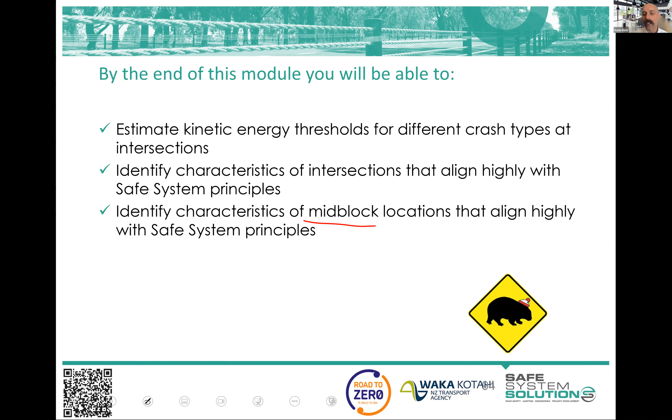Safe system assessment is sort of this entity that does a lot of what road safety audits do and a bit of what design reviews do, and a bit of stuff on their own there. Then there's a thing, safety in design - can it be built safely, can it be maintained safely, can it be decommissioned safely, and all of that. There's a lot of workplace health and safety focus to it, but there's wider stuff to it as well.

And then there's some sort of, I don't know, put DDA audit - Disability Discrimination Act. It's not called that in New Zealand, but it's: can everybody with all abilities use the facility that is going to be constructed? So that's another independent check.

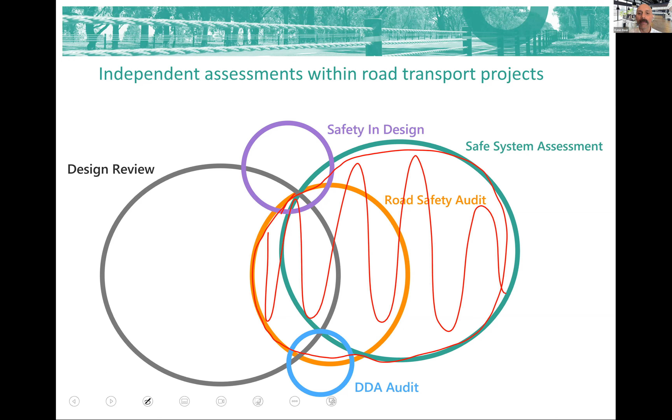So you see there's quite a few of these checks, but what New Zealand is going to be moving towards, as I mentioned last time, is really to say, well, those two have some overlap, so can we combine all of that into one there, and calling that a safe system audit - sort of combining that road safety audit, safe system assessment terminology.

Okay, let's jump straight into intersections. I have a little task for you to do shortly, where you'll have to do some thinking about an intersection I show you.

Intersections are a really fascinating part of a network, and they certainly have conflict points. We think about vehicles colliding at intersections, but there's a lot more risk at and around an intersection than simply vehicle-to-vehicle collision.

There's the spot where pedestrians have to cross to get through the intersection. We also have a whole lot of fixed hazards, like signal pedestals, power poles—which often end up close to intersections because they jump over the intersection or turn a corner—and lighting columns.

At these intersections there's quite a lot of turbulence. If it's signalized, sometimes people overshoot or miss the signals. If it's passively controlled with give way or stop signs, somebody might miss that, make a bad judgment, and vehicles then avoid, leaving the road trying to avoid the crash, or they clip the vehicle.

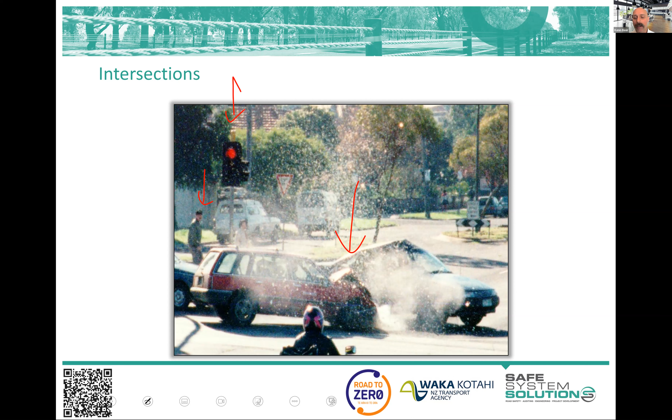So we have not just an increased risk of vehicle-to-vehicle crashes, but an increased risk of run-off-road crashes, pedestrian crashes, bicycle crashes, and motorcycle crashes. Pretty much everybody's at higher risk here, with multiple crash types created just from all of this happening. So it's a really important part of our network to analyse what we can do about it.

Monash University Accident Research Centre a while back came up with some high-level principles. Interestingly, they started with fewer vehicles and fewer intersections—isn't that interesting? In terms of our exposure times likelihood times severity equation we started with last time, that's really all about the exposure, so less exposure to crashes.

Then we get into fewer conflict points per intersection—like making it left in, left out, or trying to reduce some of the turn movements, or controlling it in different ways. That impacts the likelihood of crashes.

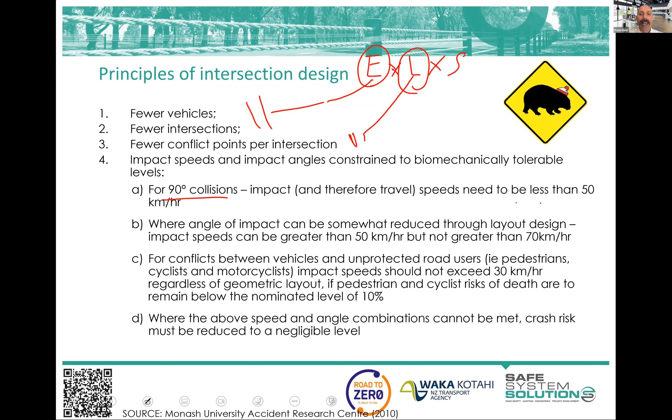Then we get into the severity of crashes, talking about trying to manage speeds and angles to biomechanically tolerable levels. They've popped some examples in here—90-degree angle crashes between passenger vehicles to be less than 50 kilometers per hour. This is all about the severity of crashes.

If the angle is somewhat reduced, we can go a little higher in speed. This goes back to your year 11 vectors—at an angle like that, you're pushing some of the energy out into the environment, compared to an angle where less of the energy is pushed out into the environment.

Head-on crashes are an interesting one—there's not much at all pushed out to the environment. However, vehicles are engineered in a very good way for frontal impact: crumple zones, airbags, seatbelts, everything operating for that frontal impact. So we're actually able to withstand higher forces.

So if you can get more angle, you're probably talking about somewhere in the 60 km/h range that's generally considered within tolerable limits. This is just for passenger vehicles.

When we start including vulnerable road users—pedestrians, cyclists, and motorcyclists—there's some more recent research showing motorcyclists are a little higher than pedestrians and cyclists in ability to withstand force, but not a huge amount more. We're talking about trying not to exceed 30 km/h. Kathy, in her warm-up quiz question, was pointing out the World Health Organization talks about 30 km/h for the possibility of death or serious injury significantly increasing above that speed for pedestrians and cyclists, and there are other non-specific road safety benefits associated with these lower speeds—it's a really good starting point.

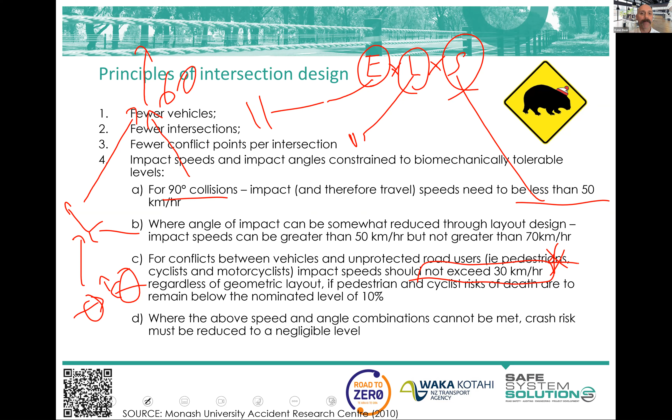Now, I've popped lots of these tables and things, but the colorful spectrum chart that I showed last module, I think, is the important one you use in safe system assessment as a starting point, somewhere you can look to gauge what sort of score should we be giving to this. You can see there, 40, 50, generally okay, 60 - this is for passenger vehicles, 60 km/h - somewhere in those angles between that. And that's from KEMM-X, which is a thing called the kinetic energy management model, which as a safe system assessor you would never need to go into that detail of using.

Well, I shouldn't say never - somebody might request a very, very in-depth safe system assessment. But as a safe system assessor, and I've done hundreds and hundreds of them, I've never had to use KEMM-X in order to determine what sort of score I'm putting on intersection crash forces. The sort of general broad brush nature of that chart and some knowledge around these figures is plenty to get you to that point.

Ken, just a quick question - does some of these figures still allow probability of serious injury, and how does that make it consistent with Road to Zero? Yeah, it's a really good question.

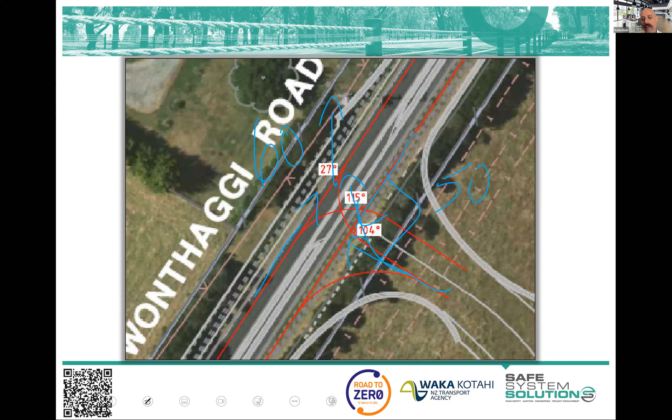So I'm saying that probably around the 60 km/h mark is what we would think of as a threshold speed, and this one around 50 as a threshold speed for passenger vehicles. So it's as simple as that - thinking angles, thinking speeds - and that helps you determine what's appropriate and how you might score it within a safe system assessment. But I do want you to think about that secondary impact I alluded to.

It's kind of rare—I mean, this does happen—it's pretty much a direct straight hit like that.

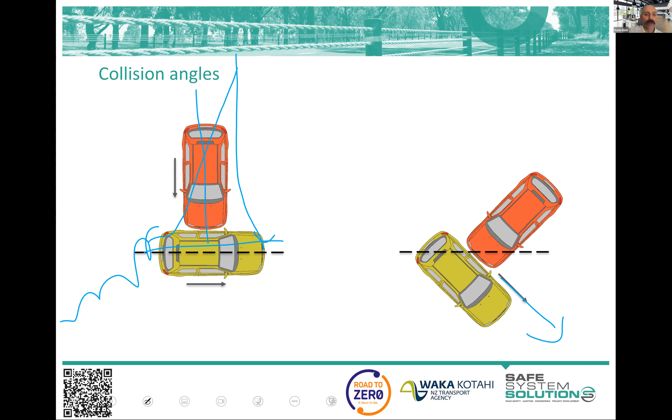But even with those, you have the entity of vehicles careering out that way, just the nature of where things were going. But you also get a lot of these where the vehicle avoids, clips the back of the vehicle, spins off—all sorts of ways that these happen.

The Centre for Automotive Safety Research plotted hundreds of secondary crash impacts where vehicles have collided at an intersection. They replotted them on this axis to see where the secondary crashes were happening, and of course they're happening out there. Did that research need to be done? Is that common sense? Probably, but they did it. A few ones spinning off and clipping and going out other directions. But it does make us think about fixed hazards around intersections being a genuine hazard.

I was doing a review of a road safety audit. Long story, but there was a lot of debate about it, as there sometimes is, and costs associated to different people and those sort of things.

It was a signalized intersection—a proposal for a new signalized intersection—with a high-speed road and a lower speed road. There was a power pole that was going to be back there. This new road had to be widened a little bit; this is the low speed road, and there's the higher speed road.

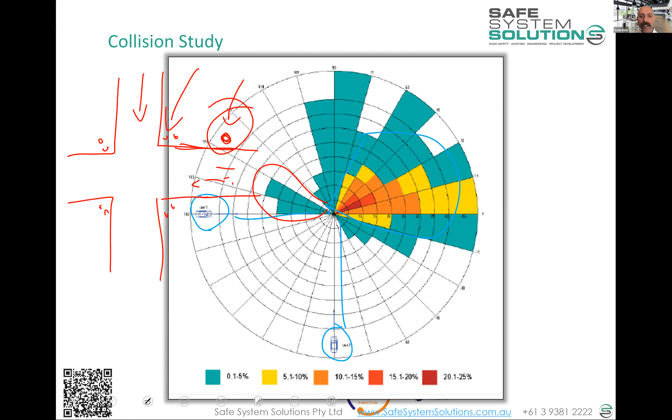But that's actually, interestingly, the kind of thing that safe system assessments can inject, because it's not about any standards or common practice. It's just looking at it and saying, well, where's the death and serious injury going to occur? Where's the energy higher than it should be? And then they may not have ways to fix this, but at least we're putting it out there. I think the audit should have done that itself, but that's all right.

Okay. So I could talk a long time, and I will talk a long time after we do a little exercise, but I did want to get you active for a Thursday here. It's Thursday, isn't it? Yeah, Thursday here, and get you working on a little exercise.

So I'm going to describe this intersection to you, and then you're going to spend a bit of time thinking about how you can redesign the intersection, or the operation of the intersection, or other things, to eliminate death and serious injury into the future, or get us as close to elimination of death and serious injury as possible.

So this is a 70 km/h major arterial. It's a highway. It's on the entry, within the built-up area of a large-ish city. It's 70 km/h, has about 22,000 vehicles a day. That's a bus stop, it's a bus route. It takes B-doubles, so large trucks.

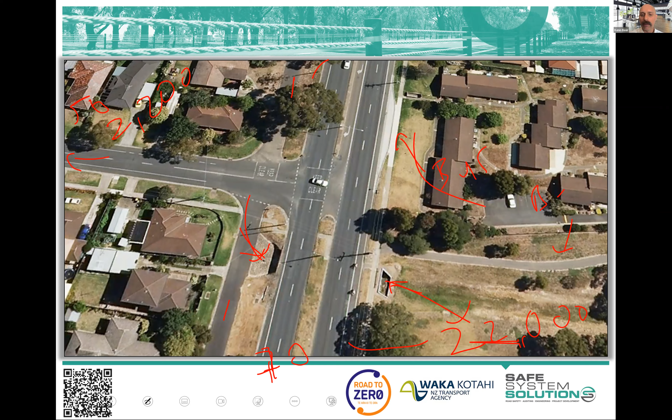I'll show you a bit of it from the street level. You can see there, that's the bus stop I mentioned. You can see two-way service roads there. You can see it's got a right turn facility there, and it's got a keep clear marking.

That's because down this way, back towards us, about 400-500 meters—actually maybe a bit more than that—there's a set of traffic signals. And in peak times, it does sometimes bank up down here.

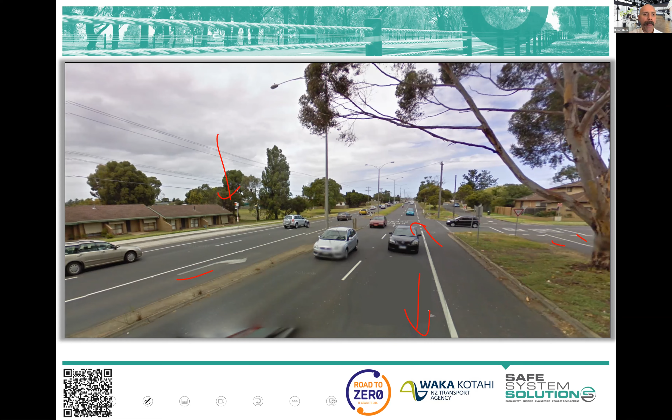Here's the other direction. You can see there's that reserve area that can collect some of that water. There's the drain, the shared user path over there. See, it's got lighting, and a sort of bike lane shoulder thing.

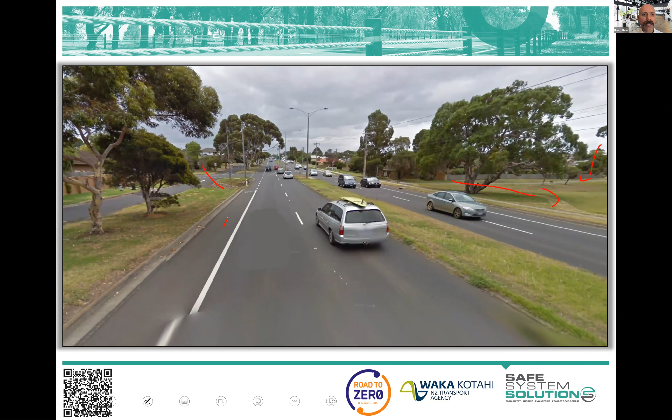I think that's it. Now, what we're going to ask you to do is remove fatal and serious injury crashes at this location. Eliminate that into the future. You've got a budget there, 3 million. I'm going to give you 4 million because everything's getting more expensive, so you can have 4 million.

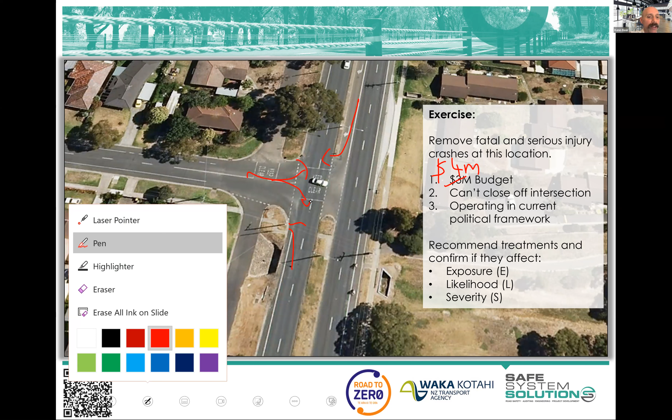Now, some other rules. Lots of consultations have been done. Closing the intersection off is just not going to work. The community won't stand for it, the school won't stand for it. So as much as you wanted to do that, we can't close that intersection. In fact, people have to be able to enter the intersection from both directions and exit the intersection both ways. Now, you can change exactly how they do that, but that's still required.

And the last one is to operate in your current political and organizational framework. What do I mean by that? If you are proposing something very out there, that's fine, but give us some ideas on how you might genuinely get that through the current system. Get people on board with it, get it approved by your directors and different management committees and the like. So anything you come up with, any idea.

So maybe, I don't know, you say improve the lighting, which would be weird because you haven't seen it at night. But if you said that, improve lighting, I would like you to put in brackets after that either E, L, or S. In the case of improved lighting, you would put L, because that reduces the likelihood of a crash. Improving the lighting doesn't do anything for the severity of crashes. I mean, maybe an occasional random crash is a little less severe because somebody saw something and braked a little bit, but generally we're not slowing vehicles down, and there's just the same ability for conflict to happen at the same speeds. It's just less likely to happen because people can see things.

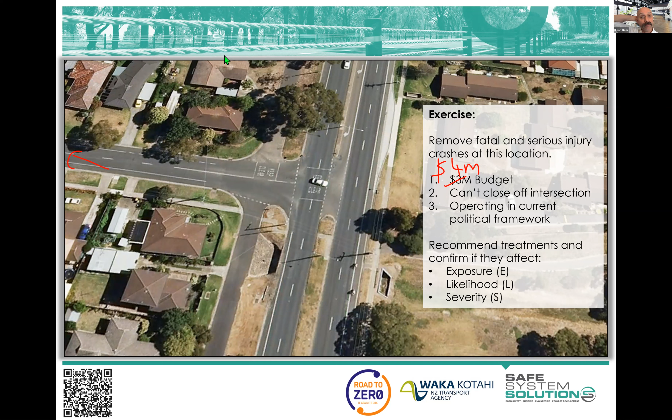Okay, let's give everybody another minute to pop some ideas in and have a think about it. But I'm seeing some good stuff. And just to confirm, Ken, we can't close off the intersection, but we can close off the service lanes, service road? Yes, if you want. Yep.

So just reading back through some of the comments there, and it's very good, good interaction. Love the interaction from this group.

Can we restrict the turnout to left turn only and keep the left-right turn in? We'll need some sort of way for vehicles coming out to be able to go right, whether that's a close by U-turn facility or something like that. They got very narky when we talked to the community about making this left in, left out only, and sending them all the way up to the signals 400 or 500 meters down the road, because that takes about 20 minutes during peak hour due to heavy congestion. Currently they can go out through that keep clear and go pretty much straight away. So those would be things that would have to be worked through.

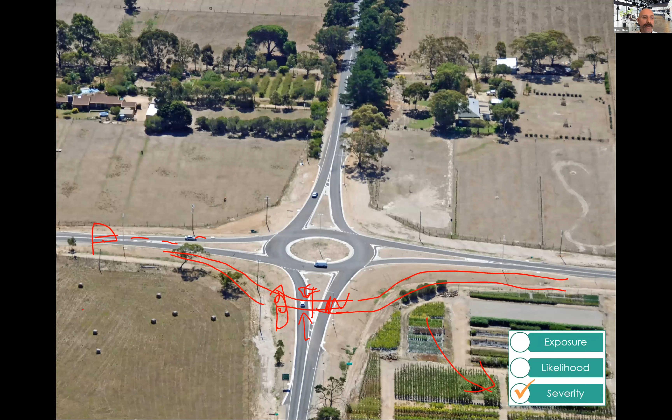Why does it need to be as big as we were talking about? And we see there—this roundabout is huge. Why is it so big? Well, it's so big because a large vehicle needs to be able to turn and have their swept path there.

The specifics of roundabout design are fascinating, and I'm very excited for the road safety conference in Christchurch coming up, because Axel, who's in this course, is going to present on some design specifics of roundabouts—radial roundabouts versus tangential roundabouts—and I think it's a wonderful conversation. I think I'm chairing that session, so that should be wonderful. Or I'm presenting in it as well on a different roundabout topic, but it'll be fun nonetheless.

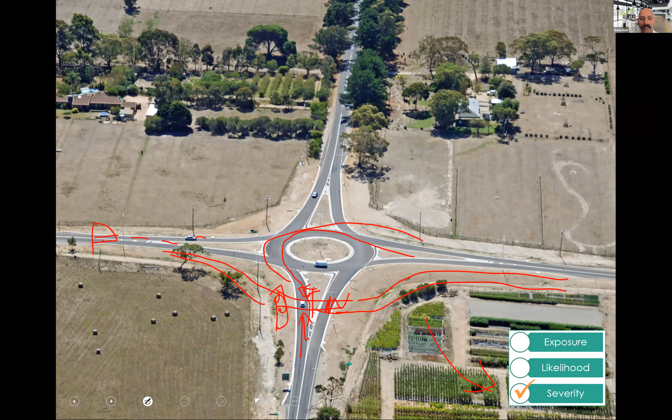We won't get into all of those specific details, but I do want to say: why do we need such big roundabouts? Here's a nice little UK roundabout, isn't it? Now, is this going to do anything for road safety benefit? A lot of people would be saying, no, it's not going to do anything. There's no deflection, there's no change.

But there is a very important little thing for us to understand: somebody approaching this intersection, nobody approaching this intersection believes they have ultimate priority. But no matter where you're coming from, there is a chance that you will have to give way.

Compare this to just a give way, where one leg just believes they have ultimate priority. And even with a set of traffic signals, when it's green, or even the geometry of it, just gives that feeling of ultimate priority. And that's where we get some trouble.

So everybody approaching this will slow down and be a little more alert to the fact that they might have to give way. I'm not saying this is going to be perfect, but for the cost of a little bit of paint, it's a pretty attractive thing to get that benefit.

It's kind of the UK's equivalent of a four-way stop, isn't it? And I think we need to start having a think about disrupting that feeling of ultimate priority at these high-risk, or higher risk, locations.

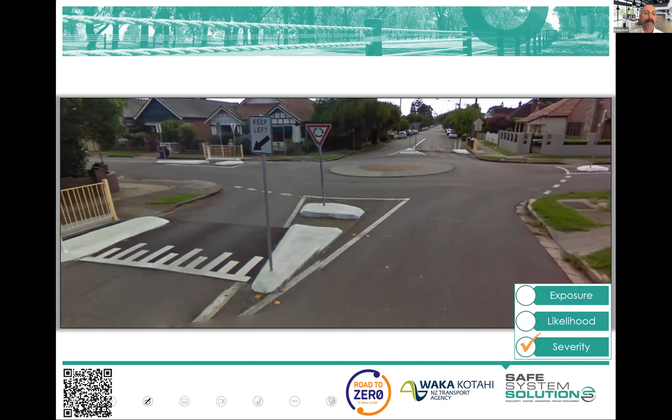People worried about that straight run high speed through there. Well, you can think about raised platforms and slowing vehicles down in this way as well. And back to some road safety engineering 101.

The crash angles, and we talked about angles and vectors earlier, and energy - this is better energy going out there. It's going to be a better crash, that angle.

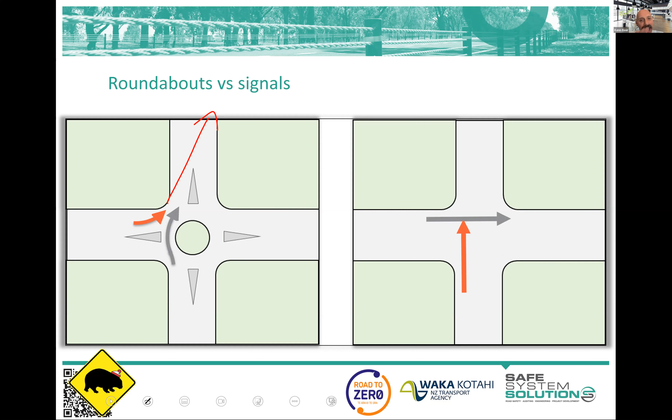And this is the one sort of back to a little bit of that ultimate priority, but there's lots of work that's been done from around the world as to why people are running red lights, and what we can do to disrupt that and wake them up.

It's amazing the amount of red light running that occurs, and it comes in varied forms. We might think of red light running as people intentionally running the red light - it's orange, and then they put the foot down and it goes red and they continue through. That occurs. They're fully aware there's a signalized intersection there.

But there's a lot of people who are driving half asleep, worked a double shift, slightly intoxicated, and they just don't register the signals because the road geometry continues straight, everything continues straight, they're driving along and they just miss it.

And I reckon some of you don't need to tell us in the chat or put your hand up, but would have driven through a red light - you would have gone, oh my God, did I just look at a red light? It happens a lot at pedestrian crossings, actually mid-block crossings, because there's less geometric clues to the driver. So yeah, it happens a lot.

Yeah, something we need to start factoring into our design thinking and decision making - how do we wake these drivers up? They don't do the same at roundabouts.

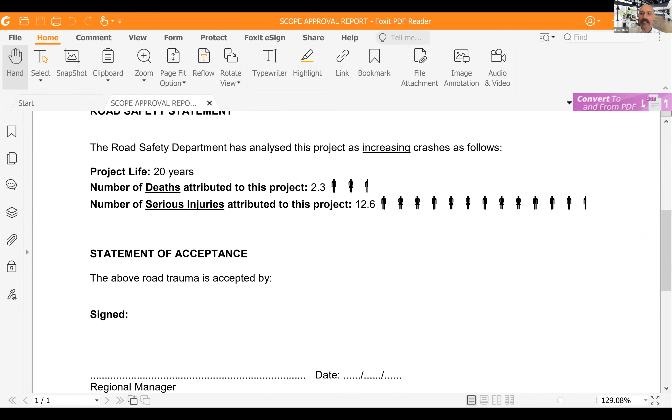Then there was this statement of acceptance: the above trauma is accepted by the regional manager, regional director managing that area. So we'd do the audit, put this on top of their project, and send it back.

Did we get any of these returns signed? No. Did we get some very angry regional managers calling to tell us we don't understand what managing a road network's about, and that there's getting people home earlier and all the competing demands of the network and appropriate balancing of these things? I'd say, well, I understand there's important things to do there, but let's not hide from the fact that we're going to kill and seriously injure people. Somebody just stands up and says it's more important to get people through this intersection a few seconds quicker than to ensure our community safely gets through there.

It's just that question of where do your priorities lie? Now, as soon as jurisdictions sign up to the Safe System, they should have committed to prioritizing safety. That's fundamental - we don't trade off human life and health for other values. Anyway, so those were taken away.

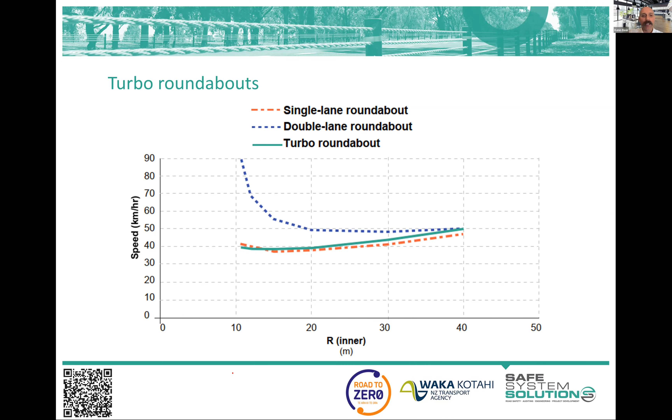Let me explain what a turbo roundabout is. It's where you have a raised separator on the approach and through the circulating carriageway, so concrete separators. If you want to turn right, you get into that right lane, come around, and out you go. If you want to go straight, you can do it from either lane - a nice radial style roundabout. So you can tell it's out of Europe.

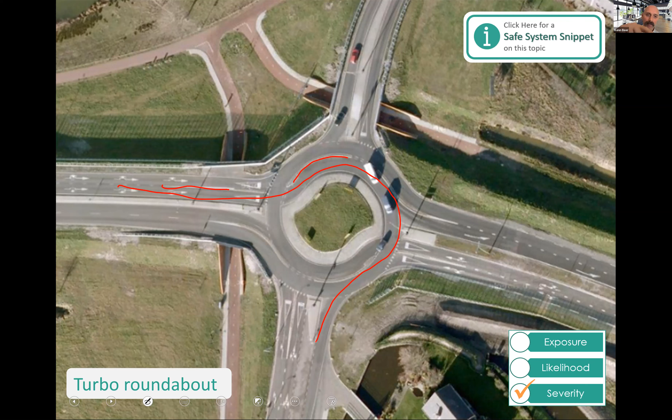These perform as well as single lane roundabouts from a safety perspective. They're quite extraordinary from that sense, and I think they're really quite impressive. Look at the bike facilities as well - it's fantastic, but that's the next module.

Here's another turbo roundabout, and I just love this photo from this perspective, just seeing what's going on here. We've got a potential conflict, but you just know that it's not going to be severe. Even if that white van hits that truck, we know the white van is going to be going slow because they've had to come in here and slow down. They're fully aware of the intersection, they're quite alert. The angle of crashes - beautiful. They're just going to clip it and carry on.

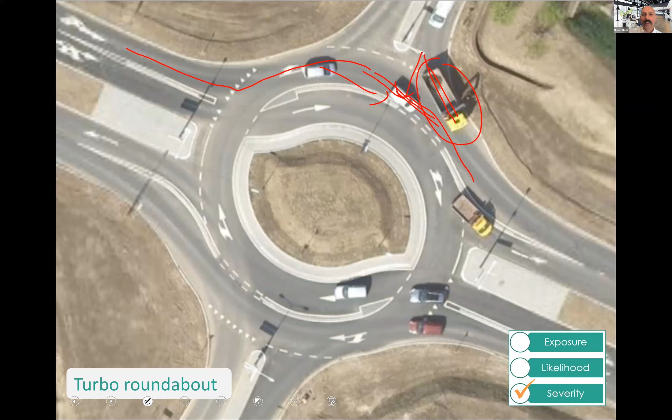If this was a mistake made - and it looks like it was by the truck - at a give way or even a signalized intersection, the angles would be worse, the speeds would be worse. Anyway, so there's some turbo roundabouts to get you going.

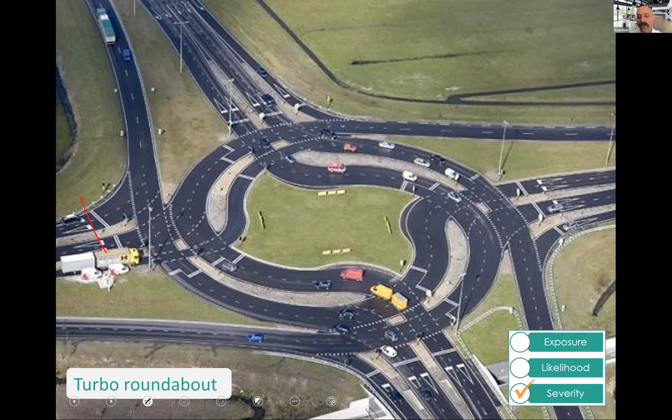It's fascinating, but that's a very different culture, isn't it? It's nice to see that some of these large signalized intersections, which continue to come in at the top in the top 10 death and serious injury in jurisdictions, people just go, well, we've done everything we can there, like we'll go look at the ones with a couple of crashes. But they're looking at: can we change them, can we alter them, can we take some of the features that we know are good from roundabouts or other treatments and integrate those into these large signalized intersections without compromising as much of what we're trying to get out of them? I like these mock-ups, the cut-throughs.

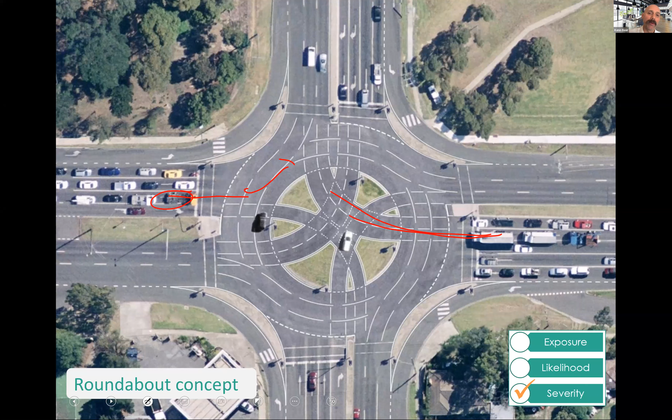This is a mock-up, it hasn't been built, but the idea is that a vehicle coming in here sees physical infrastructure, slows down, improves angle. We still get lots of good capacity through it with the injection of these turn facilities. So I think we're going to have to re-look at how we operate these large signalized intersections, because they're not going to get us close to zero death and serious injury. There's the Squircle, they call that one - a more compact one.

But I was really happy to see that a number of people here were talking about raised safety platforms or raising the intersection, like. Now, that intersection we were looking at, 10 years ago, 15 years ago, or 20 years ago, if we started talking about vertical deflection raised, we would have been laughed at and kicked out of the design office, because you would never raise a major arterial like that, because that's where the buses go, the freight goes, it's about pushing vehicles through at high speed.

But we've evolved from that. We've moved on from that. And we know that some sort of raised features can be really beneficial in giving us some of that benefit we want in waking up drivers, slowing drivers down at these critical points. And they address the severity of crash.

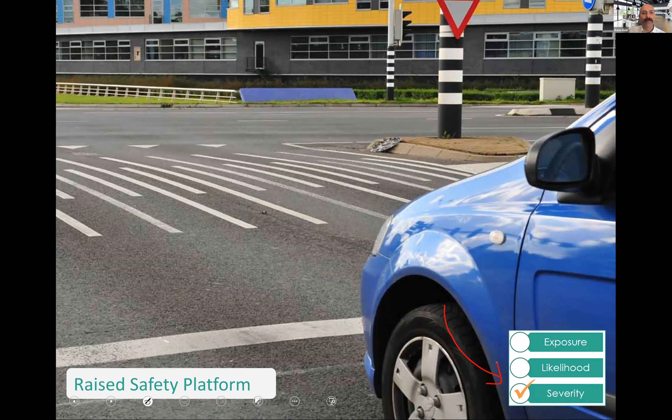So that's what they proposed at that one that you were looking at. Because they came to a similar conclusion as many of you, that signals were probably going to operate far better. But they knew that up the road, they got signals and there's death and serious injury. And in fact, they looked at their city and they said, well, our top 50 areas for death and serious injury are signalized. So there's more we can do when we build this next one, and stop just saying, well, maybe this one will be different.

And yeah, so they managed to come up with this design with raised safety platforms, not urban speed humps, but platforms to reduce the speed of these bullet vehicles. They only need them here on a T intersection and here, because they're the only vehicles they're trying to reduce the speed of. The vehicles coming in and out they're not the bullet vehicles. They're not going at the speed to do the damage. They're the target vehicles.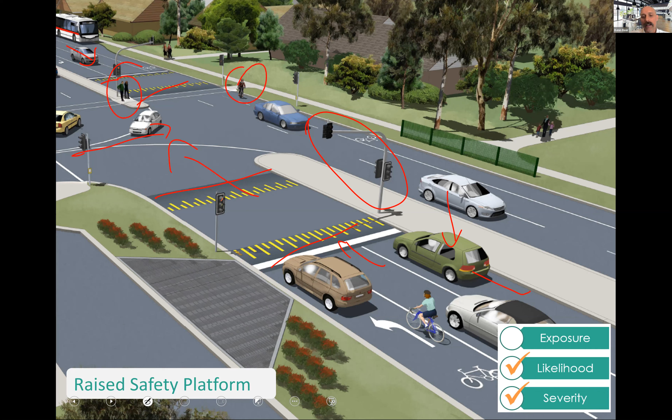And what they did is they thought, okay, well, we're predominantly interested here in this right angle crash. So let's try and get speeds to 50 kilometers per hour or below. Now, it'd be nice to see it go lower than that, to think about pedestrians and cyclists. Good start from the usual operation of it continuing at 70 kilometers per hour.

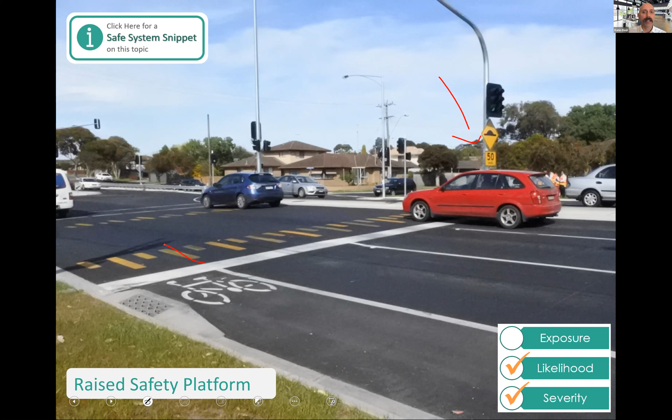So there you go, they built it. They put 50 kilometer per hour speed advisory. They tried to get the ramp grades appropriate for 50 kilometer per hour. And I can give you some good information on ramp grades if you're interested in that. You can see it there, and it's built.

I was out there doing some post-opening road safety auditing of it with a colleague, and took this photo, and I love this photo. Green light, vehicle slowing down.

And this is somewhat frustrating to traffic ops people, and they vocalize that. This is inefficient. Why are we slowing all these vehicles down for these, very small chance of being involved in an incident? And I was like, if we had the money to build a roundabout there, would people be arguing, jumping up and down about the fact that we're slowing vehicles down on the approach and through the intersection? No, I mean, it's just that this is new and people don't like new stuff and different stuff.

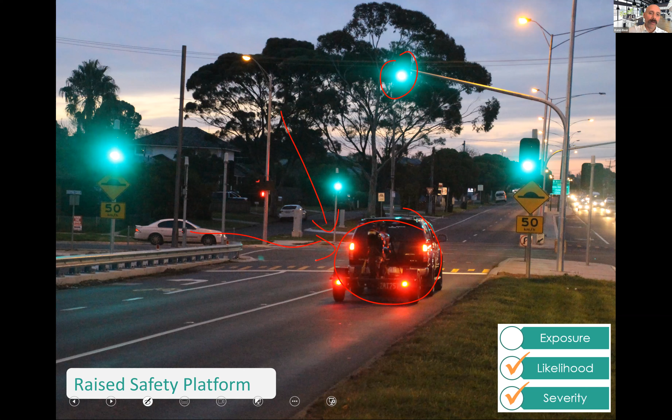But I think that's a wonderful win. We talked about the risks here. The risks are high. We've got not just these risks, but all the risks of all the poles and the pedestals and the signals and all the chaos that happens. We have the point where the pedestrians and cyclists are crossing. We should be slowing people down at this point.

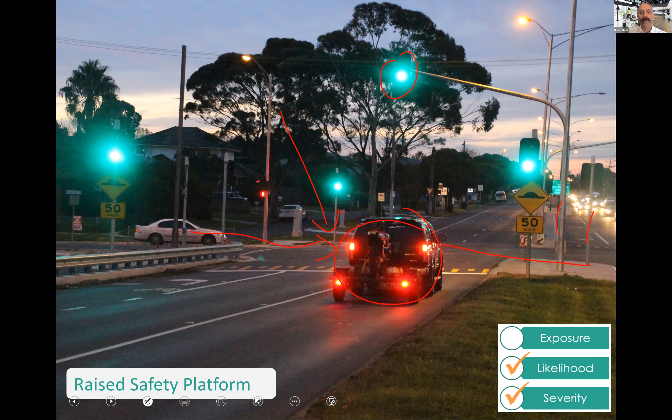Another little cool outcome of this also was reduction in the dilemma zone. Now, the dilemma zone is that period in time and space where you are in a dilemma as to whether you put the foot down and go through the orange, or you brake and stop. And the presence of a raised platform significantly means more people are stopping. And so the dilemma zone, isn't that a great, whoever named that deserves a prize of some description.

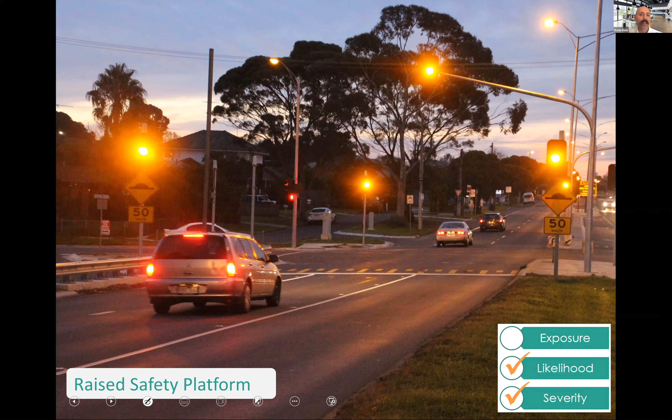It's exactly what it is. You're in a dilemma, but it reduces that because people are going to stop because you have to navigate over something. There's some more road safety wins. And New Zealand is certainly on this raised intersection bandwagon, and I'm hoping to see a huge amount more. You've got your high-profile one out there in Hamilton, Gordonton.

I'm forgetting what the other road name is. Somebody will pop it into the chat, and that's it. There, it's built.

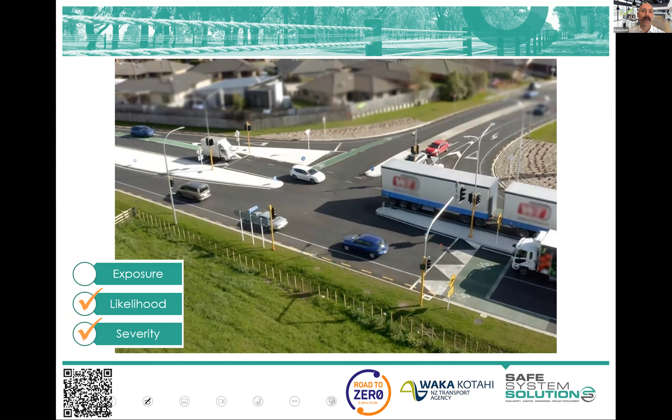Worth a look next time you're in Hamilton, going out and having a look at it. And as I understand, it's operating really quite well. I think this is going to help us significantly in the future.

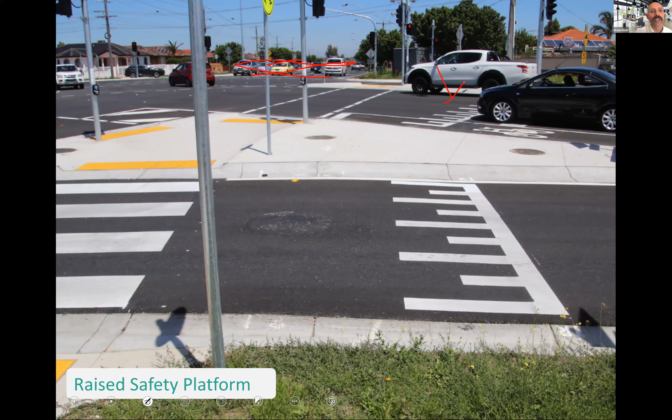This example here is a large intersection - 54,000 vehicles a day on Dalton, and 29,000 vehicles a day on Childs Road. There it is again, and I just absolutely love the fact that this used to be a roundabout. It was being replaced with traffic signals for congestion easing under another congestion easing program, 15 years later, or the like.

But a safe system assessment was done, using a fairly simple methodology, which showed there would be more chance of death and serious injury for passenger vehicles as a result of installing the traffic signals. It suggested measures be looked at to reduce vehicle speed through the conflict points, such as raised safety platforms, and they took it on.

So there we go, we got the outcomes we're looking for. There's a little bit more work to do on getting ramp grades exactly right, and maybe making the ones on slip lanes a bit slower than that. But the overarching principles are really good.

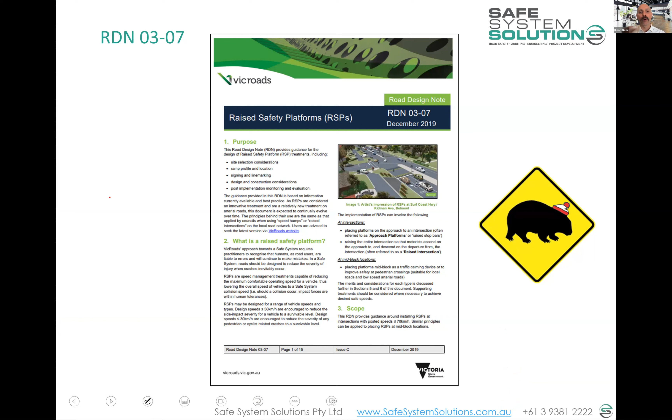And there's some good guidance now available to us. There are Victorian Government road design notes that have been published, with some really good stuff in there. There's also the Austroads document, Effectiveness and Implementation of Raised Safety Platforms, done by fantastic New Zealanders - a wonderful resource. It's even got a picture of the Hamilton one on the front cover.

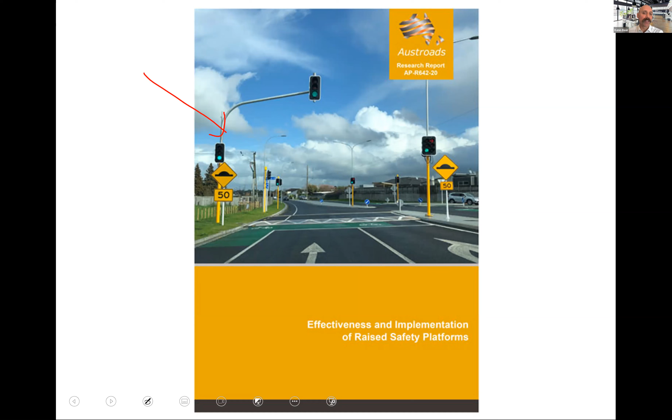I think it's worth us looking to, but the idea isn't that this is the treatment you should always do. The principle of how we arrive there - to question high speed through conflict points and look for ways to address that - is what we want to focus on and grab.

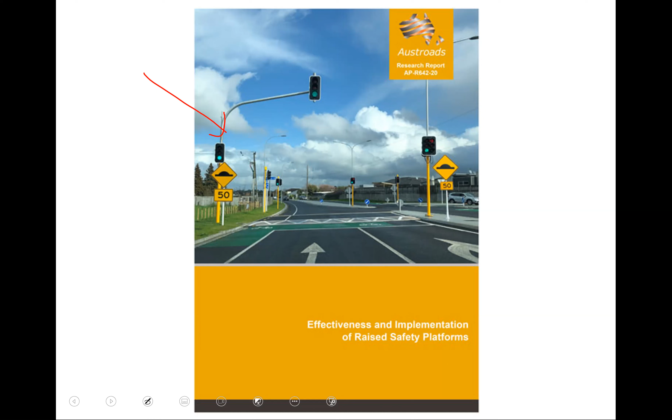I won't spend long on this, but again, it's taking that principle of high speed conflict point - what can we do about it? This is an intersection that did have a crash history. It's high speed, 100 km/h roads.

They did some speed limit reductions to try to calm things down, but it wasn't working that well. They did all these little tweaks, rumble strips on the approach, and then said, well, we need to try something more fundamental here. Let's look at a roundabout.

They did some early concepts of the roundabout, but it required a massive footprint, and there was a telecommunications exchange building in the way, so moving that was going to cost over $1 million on its own to move - let alone acquiring all the land and then all the civil works, drainage, and lighting. It was just going huge.

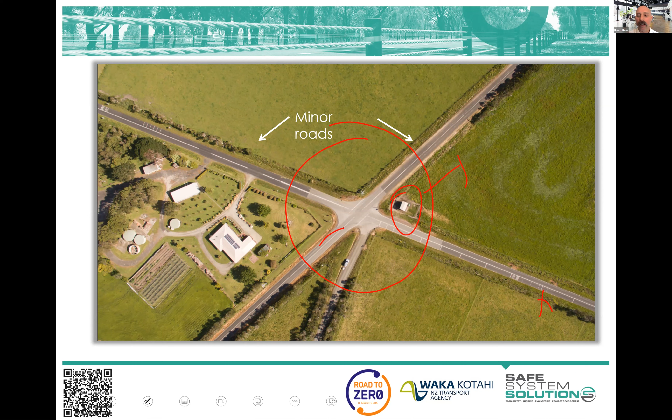So then they reverted back to just doing a right turn lane, which would help reduce the chance of crashes, and maybe looking at some rural intersection activated warning signs. I think these are good treatments, but will they eliminate death and serious injury? They'll certainly bring things down, but this one had particularly high risk elements - it was high on the list of things they wanted to do something about.

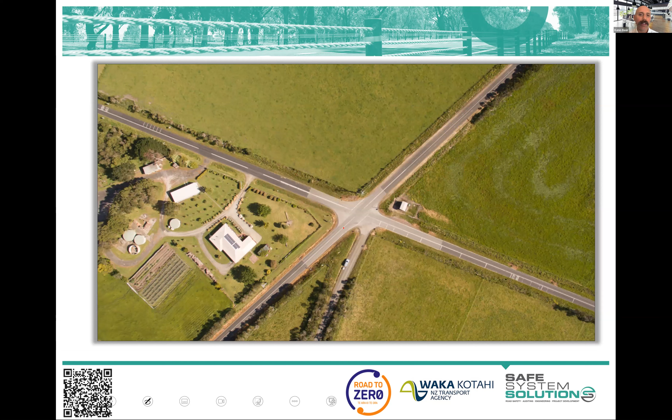And there you can see it. So they went back and said, well, what about a smaller roundabout? Somebody had mentioned this early on - what about one of these? Why do we need to be so big with that roundabout? Why do we need to do the reverse curves on the approach? For those who don't know, reverse curves are where you chicane people in, slowing them down, which eats up people's land there. So I said, well, could we do the slowing down with raised platforms again?

Could we have a very small roundabout with a big concrete apron?

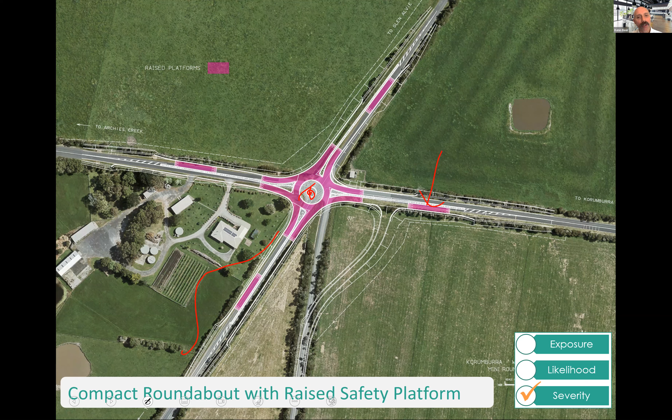So it's looked at, and this is where we get into sort of compact roundabouts, still trying to get that same outcome, or very close to it, at a lower cost. I can happily send you the detailed design of this, but there's some really innovative design thinking in this.

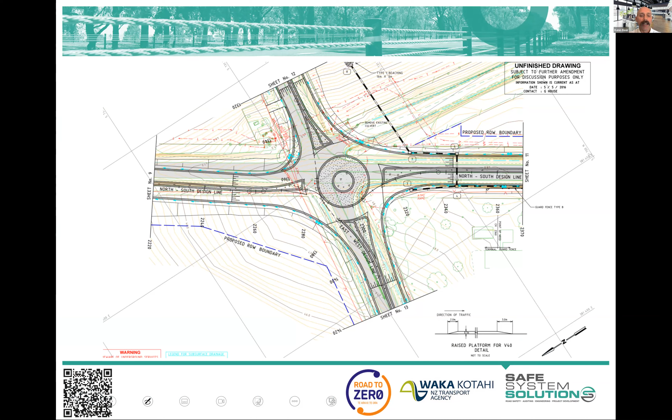That one was built, and you can see shallow raised platforms on the approach slow vehicles down, kind of operates like reverse curves but in the vertical sense. Then this roundabout in the middle has a big concrete apron. You can see a very small actual raised bit where I've got that red dot, and then the big concrete apron. The roundabout itself is only that big. Didn't have to move that.

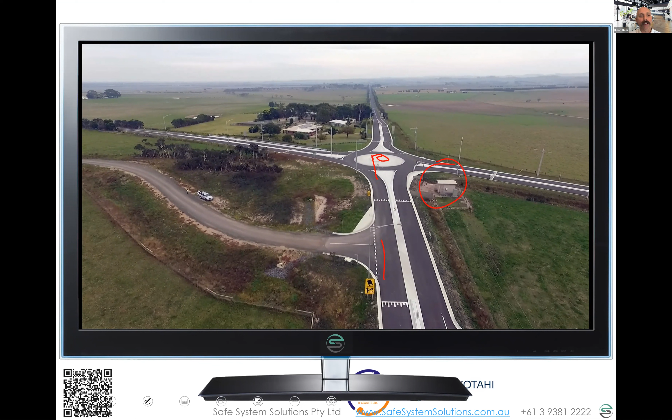That's good, still about half the cost of a full-size roundabout. So you're not getting them super cheap, but it's far cheaper than a full-size roundabout. So I think it's good.

They'll present a paper on compact roundabout design at the conference in Christchurch, so that'll be good, I'll give some specifics. It gets a little bit annoying from a design perspective - you can't put lights in the roundabout, and you have to think about these raised platforms, drainage, and swept paths and bits and pieces. But yeah, I think there's a lot of potential there. It's always nice to have some drone footage of one, gets everybody excited.

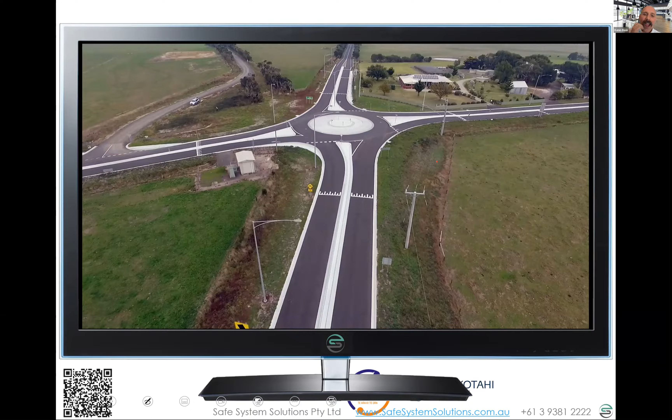Okay, quick quiz, Kathy, and then I'm going to move through some stuff quickly to give us time to introduce the little exercise for people. Hopefully that pops up on your screen. True or false: traffic signals are not safe system. True, false, or unintelligible question - unintelligible question meaning that doesn't make sense, you haven't given me enough information or context, what are you talking about, Ken?

So I'll let you ponder that.

Ken, we had a question earlier which I didn't quite get to. You talked about New Zealand moving to a road safety auditing process with the safe system assessment - what was it, a safe system audit? So what sort of things would be included in a safe system audit, but not the traditional road safety audit? Nothing - everything you do in a road safety audit and everything you do in a safe system assessment mashed together. If the two overlap you may be able to not do it twice, but it's everything. Terrific, thank you. All right, I'm going to end that one.

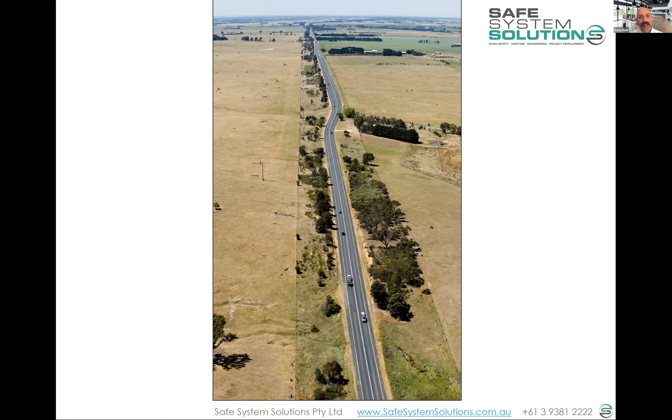So it's really quite a challenge because of the expansive network we have. Huge amounts of New Zealand roads sit separated by white line or yellow line, with hazardous roadsides and energy far beyond what we can possibly handle if those two collide at the speed they're going.

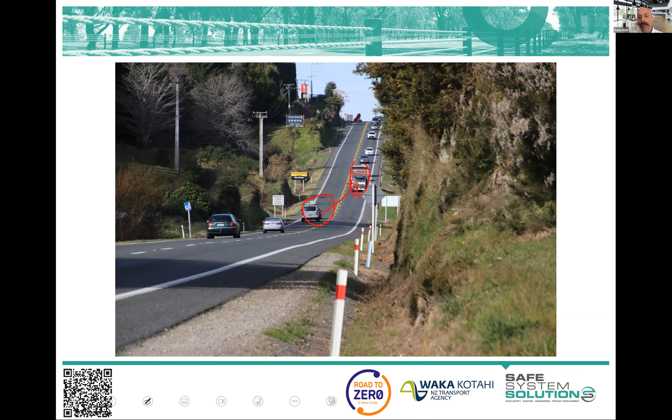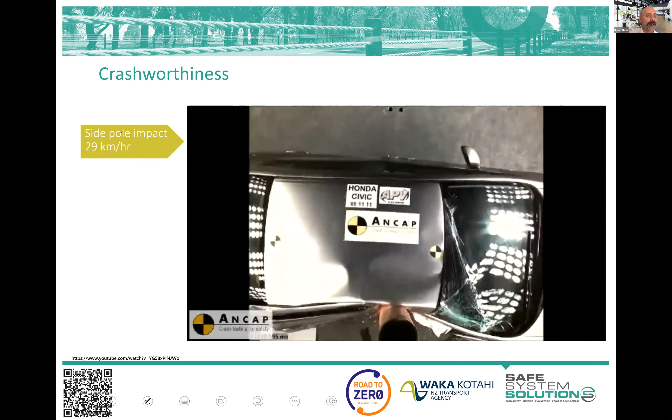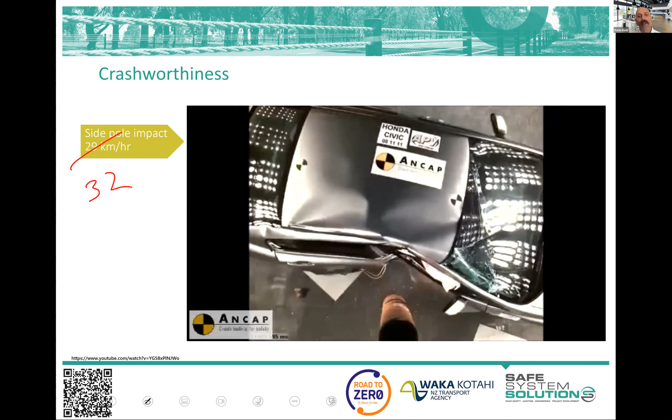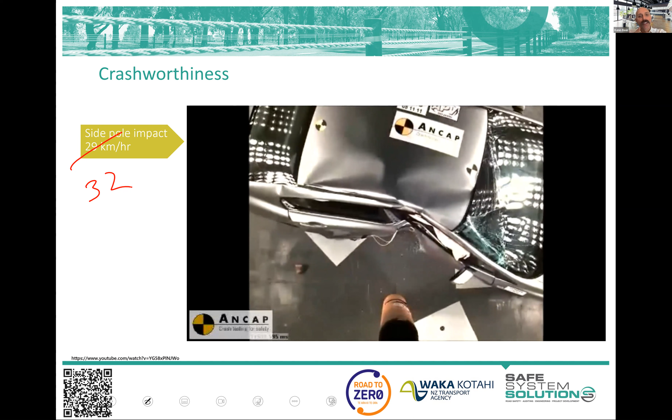We talked about that speed of impact, that threshold speed, 29 kilometers an hour, now up to 32 kilometers an hour. But that's all the vehicle's side is really designed to handle. If we've got trees and power poles and the like, we're in huge trouble as people leave the road. They desperately try to get back on the road when they wake up, and as a result they start to yaw, so they slide, exposing the side of the vehicle to crashes.

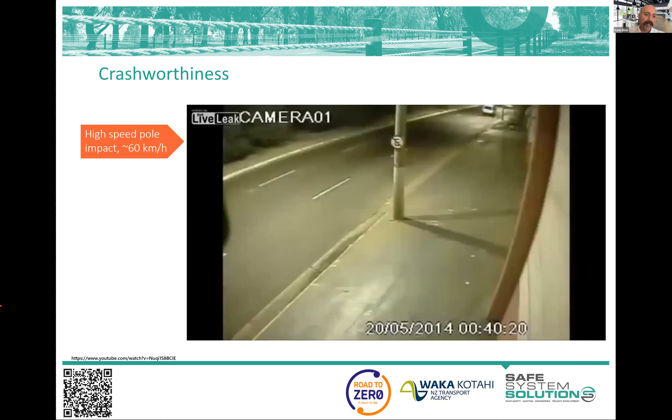Here's a little video that's being looked at and analysed, predicted at about a 60 kilometre per hour impact speed. Now turn away if you need to here.

The violence of that, the energy of that is just staggering. It is absolutely unsurvivable in terms of the forces, and it's predicted at 60 kilometers an hour. This is just devastating to see. Crashes, and New Zealand's had plenty, and a recent one in Australia, 4 young people just killed instantly hitting a tree. There's no possible way they can survive at these speeds.

So if we clear out these hazards, are we going to eliminate all the death and serious injury? Well, the answer is no. We're going to reduce that risk significantly, but we introduce rollover risk, because you've got more space. Now, you would take rollover risk over fixed object risk because there's far less energy transfer, but it's not perfect.

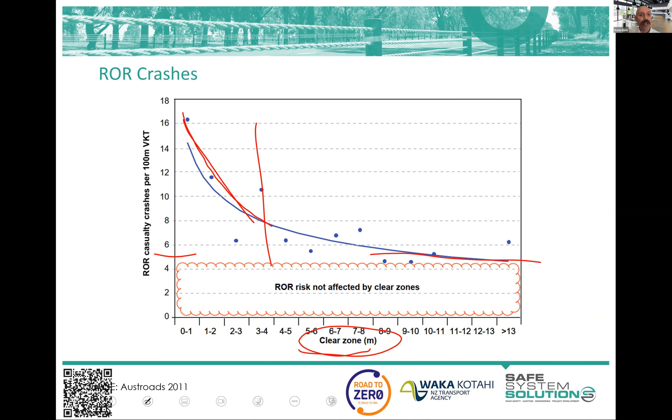But now we know there's actually a safer way to manage the roadside if you can do it. So clear zones, we say, are not necessarily a safe place to be. People will go beyond whatever clear zone is created, and there's rollover risk.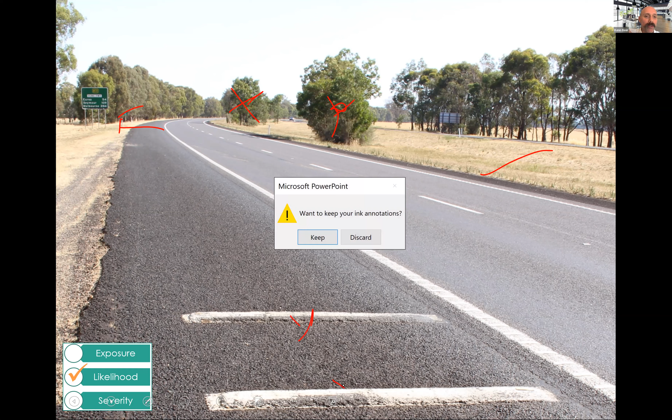Well, actually not with the truck rumble strips, but it's going to jump me out of that, isn't it? But with the clear zone and big wide median.

Now we know people shoot across these, and a tragic incident in New South Wales happened after the opening of one of their major $1 billion Pacific Highway upgrades, 2 months after it. Big wide median like this, the vehicle goes across, hits another vehicle. There were 5 people killed, a family. You go, what on earth? How could we possibly spend $1 billion to create this new bit of infrastructure, and then within that quick amount of time, 5 people killed. Imagine if a train line did that - the train line would be just stopped.

They'd be shut down. But the road is, that's what happens. Anyway, so we've got some new guidance on this.

We've got the new Part 6, Guide to Road Design, which reassesses how we think about roadside and roadside risk, and acknowledges the amazing advancements in road safety barrier technology. We've seen huge benefits and huge gains in recent times.

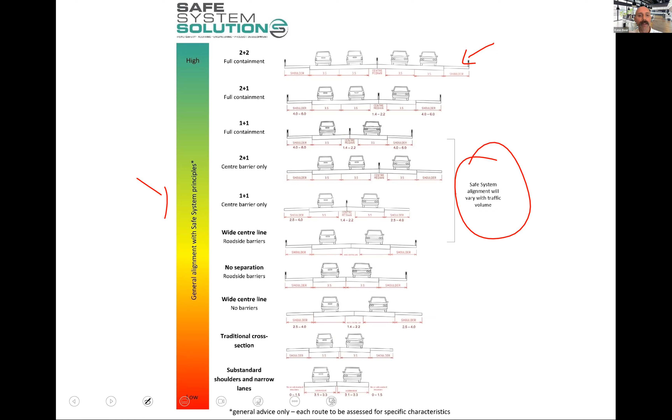And that's a sort of little mock-up of alignment with safe system principles. You've got some interesting variations of what gives you better safety outcomes on volume in different configurations. But yeah, the details of design of these, there's some specifics you've got to think about.

Catering for people breaking down and making phone calls and needing to change the kids' nappy or whatever it is. And you can sort of get a little bit caught up in just what the research and evidence shows only. Like, that is super important.

But this one, for example, we know that it's actually lowish risk, and we could get far more barrier out without blocking these areas to pull over. But the community really didn't agree with that, and we were forced to do some very expensive retrofit works.

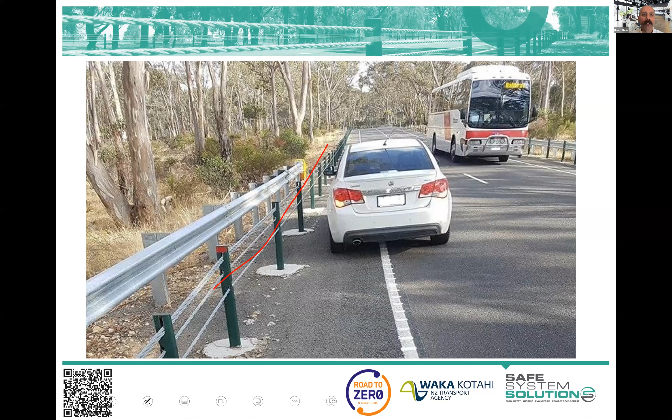So just thinking about details of the design. The last one, I think, before I hand over to Kathy to take you through an assignment, is again thinking about energy management, energy redirection and the like, and this particular crash that happened in Mildura country town.

Four young male passengers at 2 a.m. I mean, the scenario is all too familiar, and that's lots of stuff we need to do in other elements of the system to try and reduce the occurrence of that scenario.

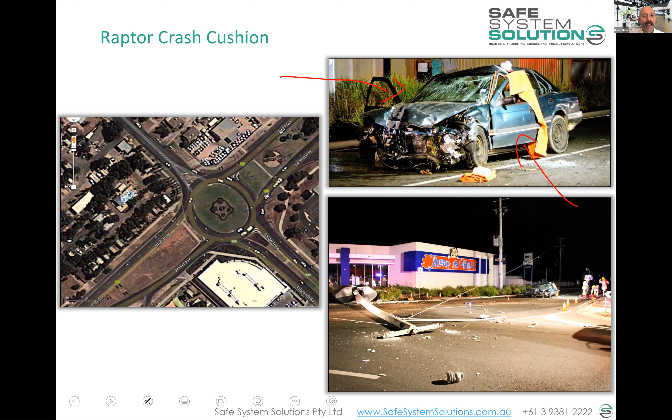But when the vehicle left the road and hit a power pole, and this is scarily similar to the one that's just happened in New South Wales, the pole had a raptor cushion on it.

A raptor cushion is this thing. It cushions, but it also rotates. The idea is that the energy of the vehicle is sort of pushed along as it hits it, just due to that sort of design, the energy is moved along. The vehicle continues if it's hit at that angle, and it cushions it a bit.

Now, I'm not particularly saying get out there and buy this product. I have no allegiance to this product, but I love the idea of trying to think about management of energy in these tricky scenarios where we don't have enough space to put a barrier system.

If you've got space to put a barrier system, it's far superior every time. But I think this is a really unique and nice way to think about energy management.

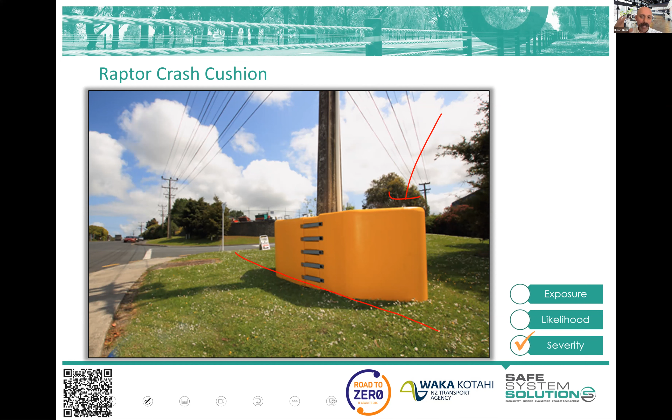And that's the big thing - a lot of the time in the past we've forgotten to really focus our attention on severity, and we've thought we can continue to work on the likelihood. Let's work on both, and exposure if we possibly can.

Let's not do that quiz, Kathy. Let's just show them the assignment, maybe answer any questions that are still to come.

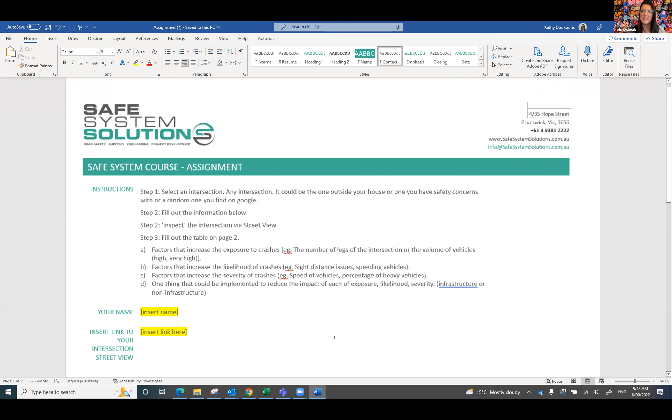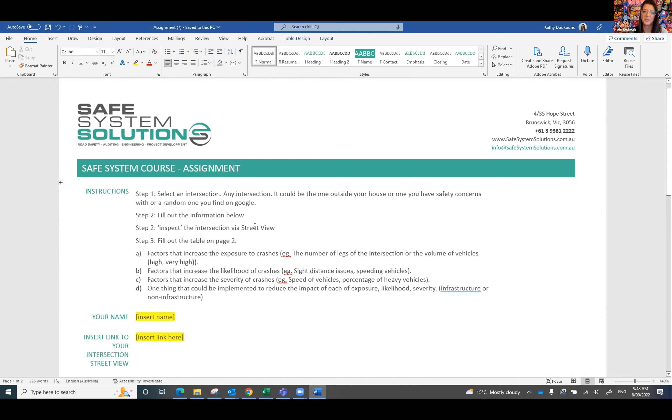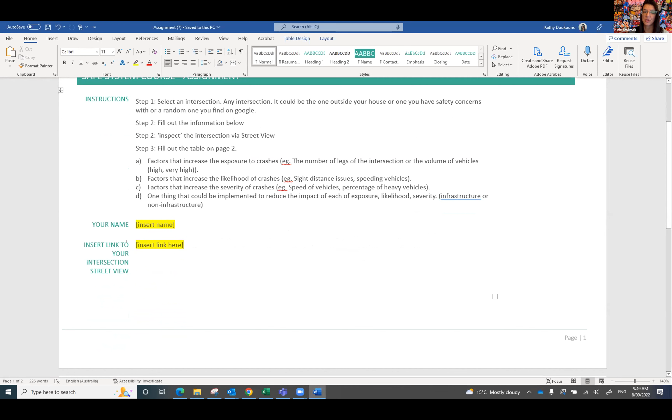Basically what we're asking you to do is find an intersection, any intersection, one that you're familiar with, ideally, something outside your house. You don't have to actually go and visit it, you just have to inspect it via Street View or using your existing knowledge. Then what we want you to do is complete any of the highlighted sections. So here it says your name - you insert your name and insert the link to your intersection Street View, so we can also have a look at it.

Over the page, we're looking for factors that increase or influence exposure, likelihood, and severity. Minimum 1 factor, maximum 3. We don't need you to write pages and pages, because Ken doesn't have time to review pages and pages. Then we're looking for 1 change that would reduce the impact on exposure, likelihood, and severity. Ken, you might go into a bit more detail there. So very, very short, sharp, nothing that you need to spend hours mulling over. Just 15, 20 minutes. And if you're struggling, please get in touch with us.

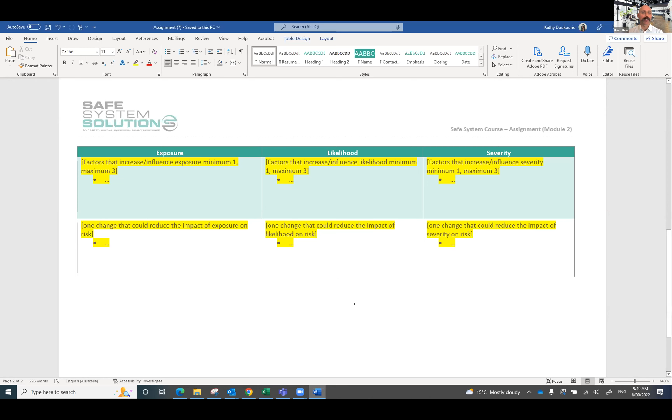Remember the purpose of this assignment is to ensure that you've got your head around the classification of exposure, likelihood, and severity. We're interested in ensuring it's good road safety thinking and the like, but it's about classification.

So I can just quickly give an example of a hypothetical intersection. Exposure is influenced by the large number of pedestrians crossing to get to the shopping centre, the large number of cyclists coming off the cycle path crossing to get to the shopping centre. Then the likelihood is influenced by the fact that this is controlled by a give way sign only, that there's low visibility out of the side road, and that there's poor lighting. And the severity is influenced by the speed of vehicles on the main road and the percentage of heavy vehicles that are there, because they're going to create more severe crashes.

An exposure could be - how do I change exposure? Well, we're not limiting you on anything here. I'd say, okay, we're going to create a pedestrian cycle underpass from the end of the shared path to the shopping centre. It's going to cost a heap, but that shows that I understand what exposure is, because now they're not exposed to the crashes there. And likelihood, we're going to build curb build-outs to open up sight lines coming from the side road. And severity, we're going to reduce the speed of vehicles on the approach through speed limit reduction or raised platforms, or we're going to put a roundabout in, these sorts of things.

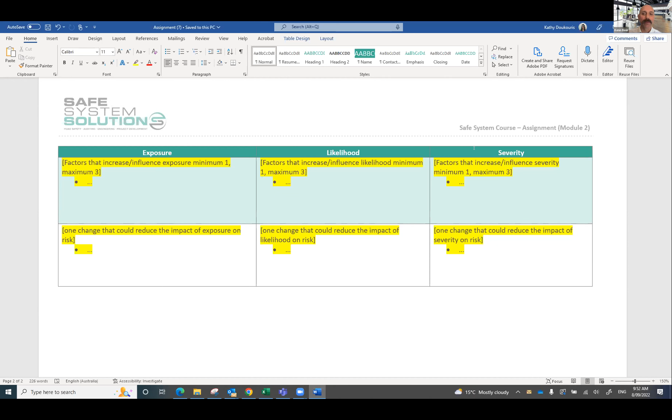Of course, if you have any questions, get in contact and should be able to do it quickly. You don't need to go to a site for this one, you could do it on Street View. And hopefully you can knock it off very quickly.